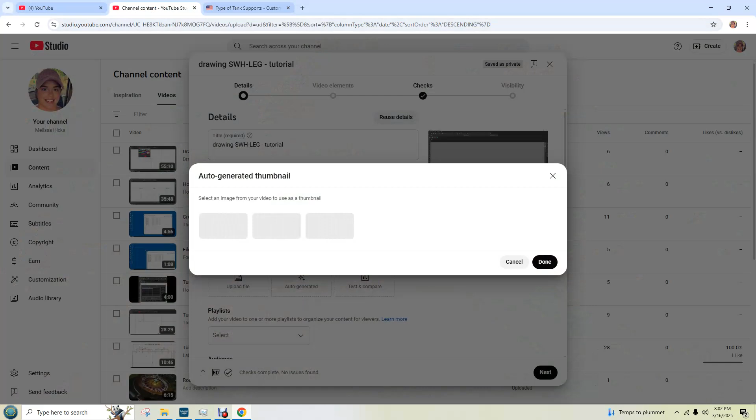For this video, I'm going to have you draw tanks on what we call box skids, B-O-X skids, but the formal name for them are tubular skids. These are probably the easiest ones to draw, and this is what they look like. It's just a flat piece of metal, bent the same way a leg tank is bent. It's real similar, the dimensions are just a little bit different.

So I'm going to show you how to take your existing leg tank drawings and make tubular skids. You go to your double wall horizontal folder and go copy. Of course, I'm working on my home PC, I don't have the same thing that you have, this ain't been updated in a while. But you're going to copy the entire contents of that folder.

You're going to paste them into here, and you're going to change for each one, LEG to BXSKID. So you're going to change every one of them to that.

Now just do a Control-C, Control-V. There's some batch renaming applications. I used to have one of those and I don't have it anymore. I don't work on a PC much anymore.

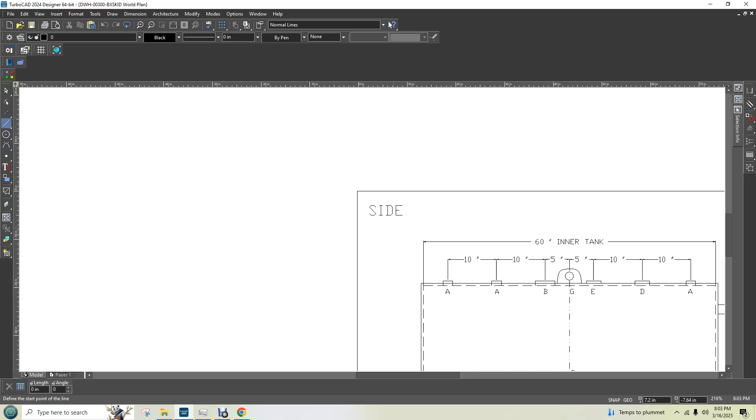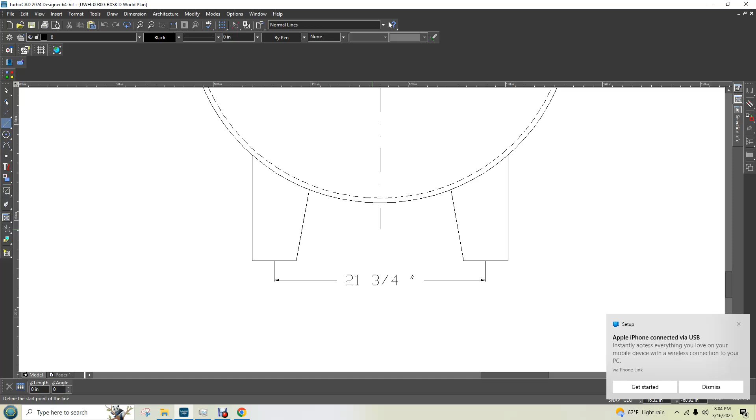We've got to do a little work to these because this dimension down here, I've actually got to get you to redraw these. That dimension is going to have to be different because we do these in a manner on which they can be mounted to a truck frame. So I'm going to check and see what we've got here, because I know we've got to be 34 inches end to end, and here we're not, we're 26.

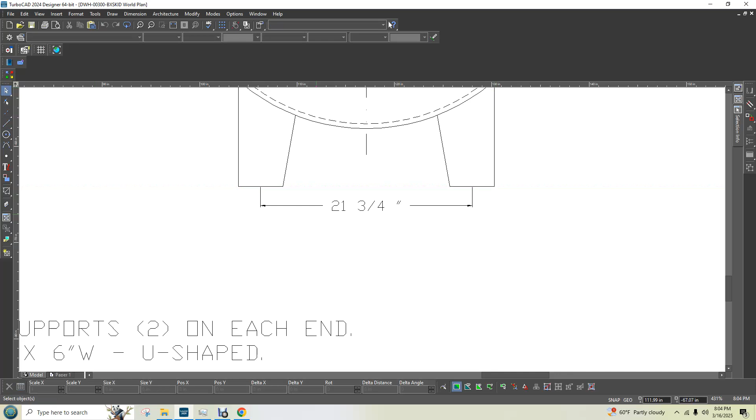Now, for every one of these that you draw, you're going to need to be 34 inches end to end. That's our given information. So you're going to have to redraw these, and I'm going to show you how to do that. I'm going to make a note about that angle right there, that was like an 80-degree angle. I gotta write that down, 80-degree angle.

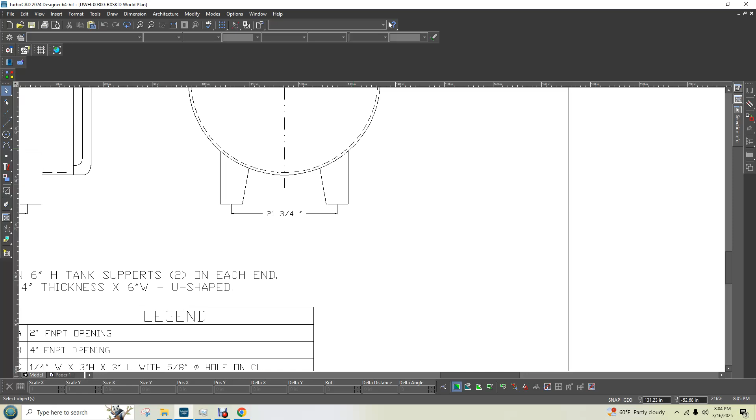So really, our other given information here is we are 6 inches from the bottom of the tank down to the ground. That is every support that we have, for 6 inches.

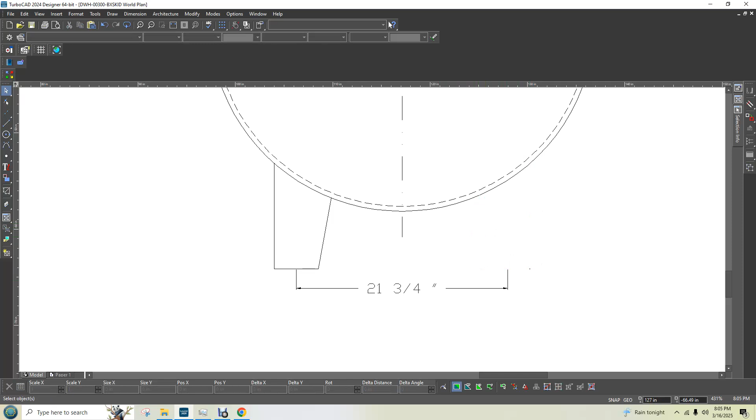So we're going to take all these pieces and delete them, take everything here and delete it. This is going to be the same procedure for every one of these that you draw. Our given information is we are 6 inches from the tank to the ground.

So I'm going to do a temporary line that is 6 inches at 270 degrees, and that's going to get our height to the ground. We are 34 inches end to end, so half of 34 is 17. So we're going to go 17 inches to the right at 0 degrees, and 17 inches at 180 degrees to the left.

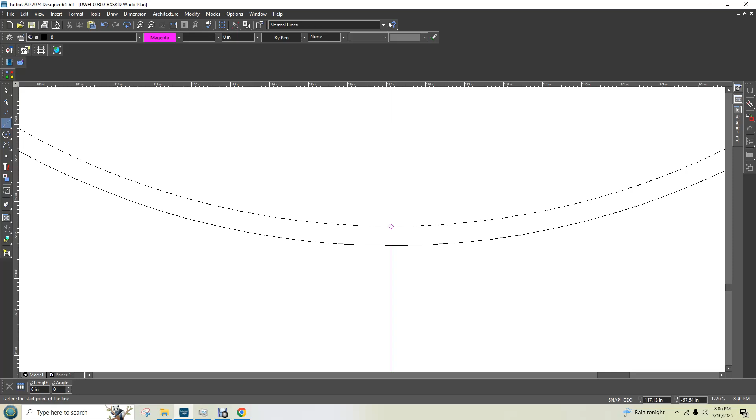Now we're going to do a permanent line. This is going to be a little bit tricky. We want this to be at a 90-degree angle, and we want to touch that circle, so it's going to take some zooming in. See how I went to local snap, right click, local snap, I'm going to do nearest on graphic. That makes the most sense to do here.

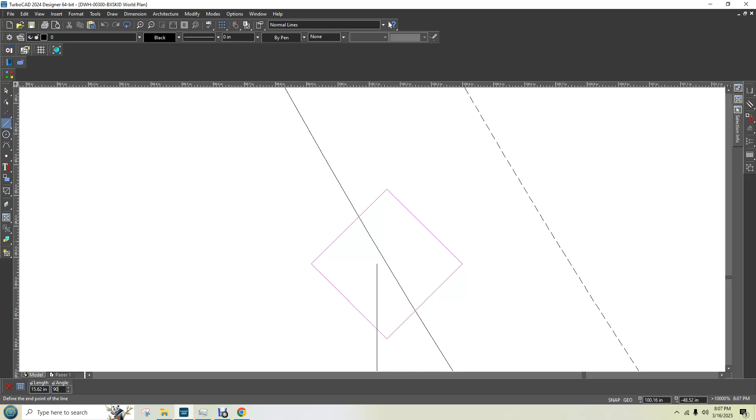See that pink diamond back behind my little plus symbol, how it just runs along? I'm going to change to 90 degrees, and I hope that it just snaps right in. It didn't, but that's okay, let's just hit enter, we're going to make it snap in.

All you have to do is grab that and just pull it up, and just keep zooming in until you see it touch. All we can do is all we can do at this point. Now see, I finally got that little pink X there, it finally touched it.

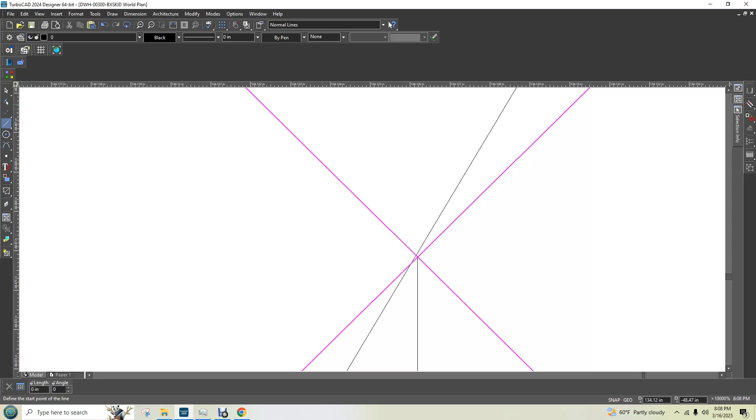Now over here it's going to be easy because we've got our size Y is 15.67. We should be able just to do a 15.67 line at 90 degrees and it should touch. Let's see if that doesn't touch it, and it sure did not. You're always going to be off a little bit, that's okay, we're going to zoom in as far as humanly possible.

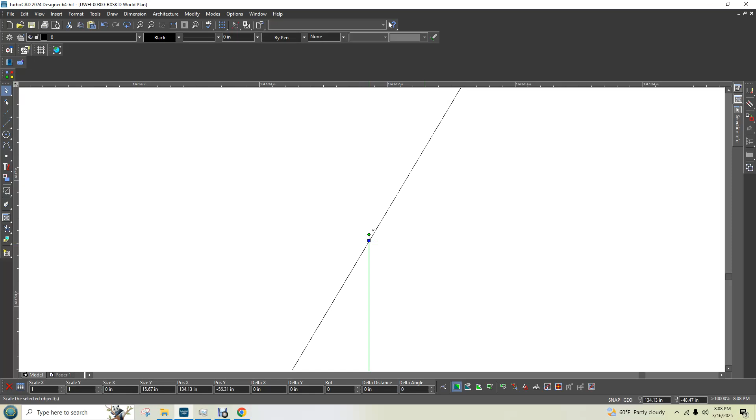Grab that and pull it up. It won't let us zoom in no more. See, we finally got that little pink diamond, I went down just a little bit, like I moved it up and down, and I finally got that little pink diamond. That's what you're looking for, is that little pink diamond. So over here, just go up beyond it and back down, you'll finally get that little pink diamond for the intersection.

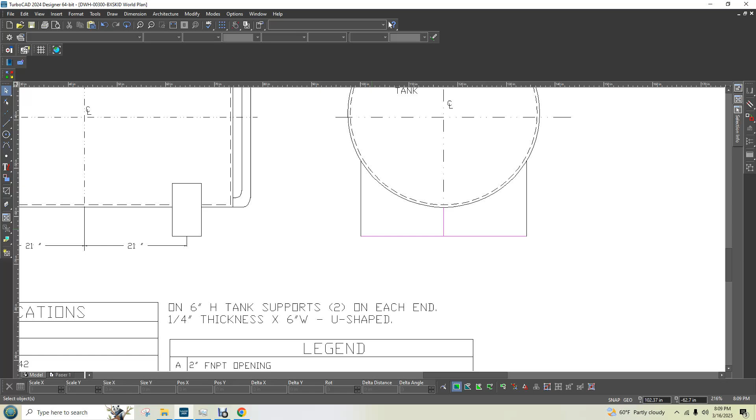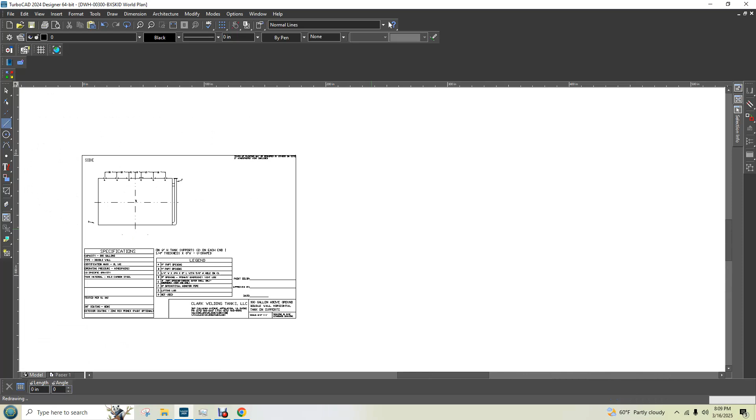The next thing you want to do is delete your temporary lines. The foreman said that the base on these is 3 inches, so we've got a 3-inch base. Okay, a 3-inch base.

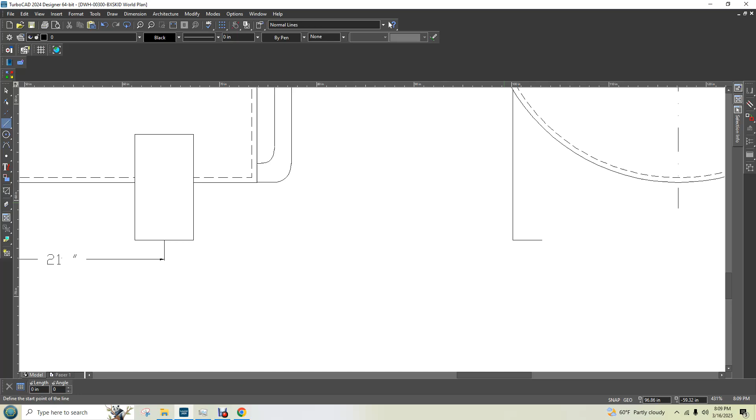And then now we've got to connect it. We're going to start a line here. You draw a single line or hit the little line icon over here, either way. And sorry about the wildness of this mouse, I hate working on this computer at home with a touch mouse. We're going to go local snap, nearest on graphic.

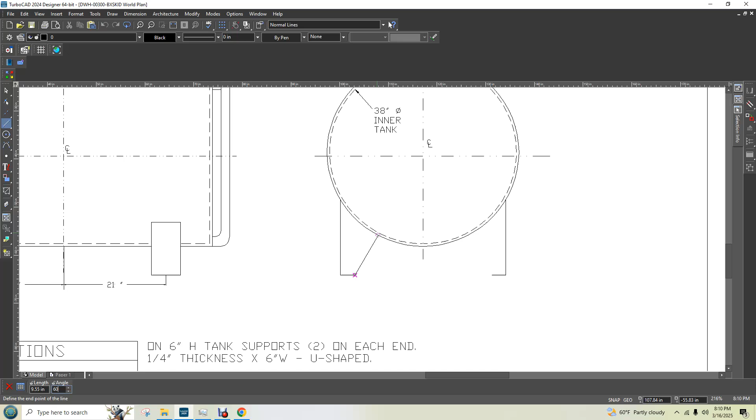We're going to do a 60-degree angle here. And it snapped, but it snapped on the inner tank, and that's not what we want. I'm going to have to redo it and try a 60-degree angle again.

Right click, local snap. Let's try intersection and see if that does any better. I don't think it does though. It don't. I got all kinds of messed up now.

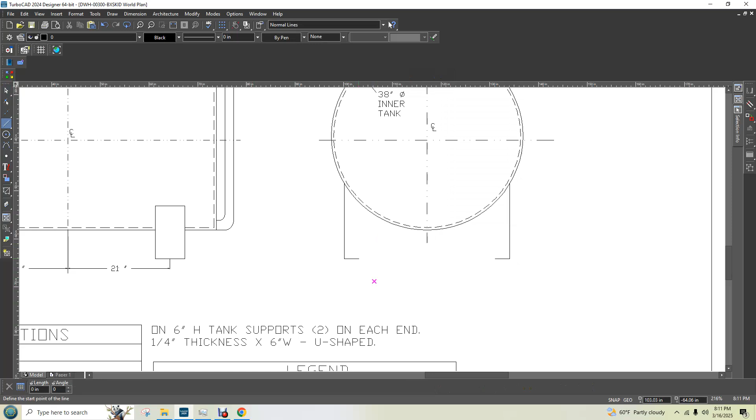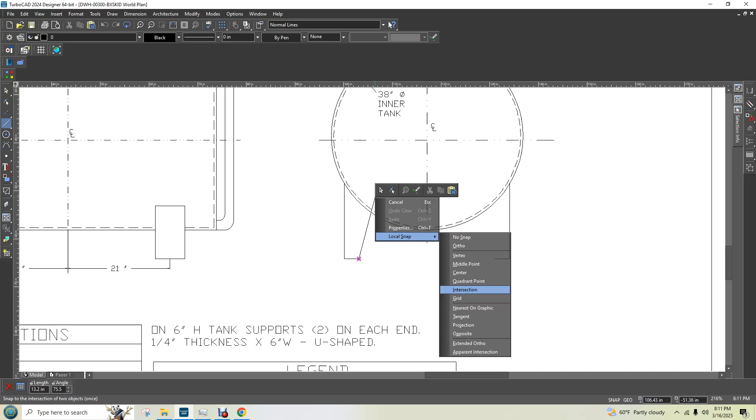So you're going to do it while your line's in your hand. Right click, local snap, intersection. I'm going to zoom way in, trying to get this thing. No, intersection doesn't do good. We gotta do nearest on the graphic.

Right click, local snap, nearest on the graphic, and you gotta make it do that while the line is in your hand. I'm looking for a 60-degree angle, trying to get that while I'm moving left to right here on this line. That's really the easiest way to do it, but if we can't... I got 59.99.

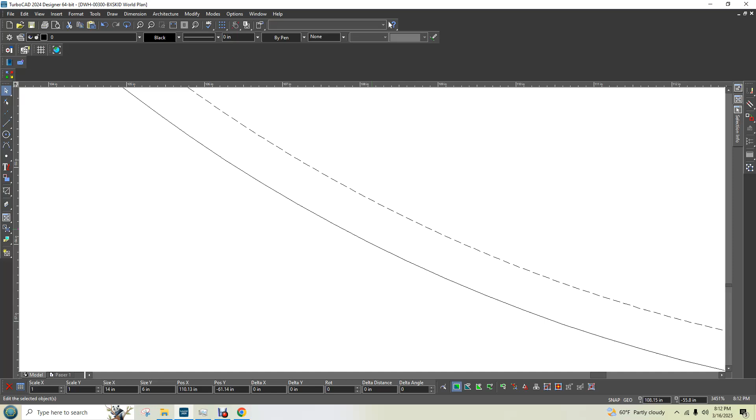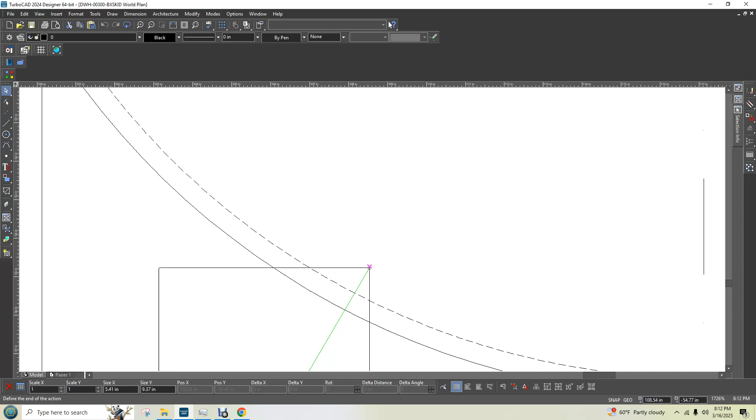Be better just to draw it longer and then snap it back. Now I'm struggling, and you're probably like, what is she doing? Alright, I'm just gonna draw it longer and snap it back. That don't work either. This is really hard to do.

Okay. I wish I was getting paid by the hour to do this. And I'm not, I'm doing this for free, because I'm salary paid. Okay.

Nearest on graphic, zoom way in. We're looking for 60 degrees. This is so hard to do. This is why I did all the easy ones for you before, because I didn't want you to start out doing these. You'd be so intimidated. Now we're on 60.

I'm going to be so careful. I'm actually just going to let go of my mouse, and I clicked it. I let go of it and I clicked it. Okay, so this line, our size X is 4.78, size Y is 8.28. We're going to do 60 degrees.

Okay, let's try this. Local snap, nearest on the graphic. What was that, 8.28? 8.28 and 60 degrees, let's try this. Oh no, we can't do the 60 degrees because we're going the other way.

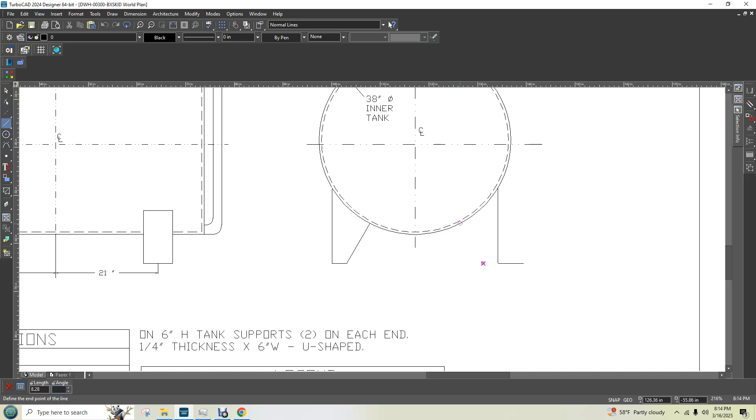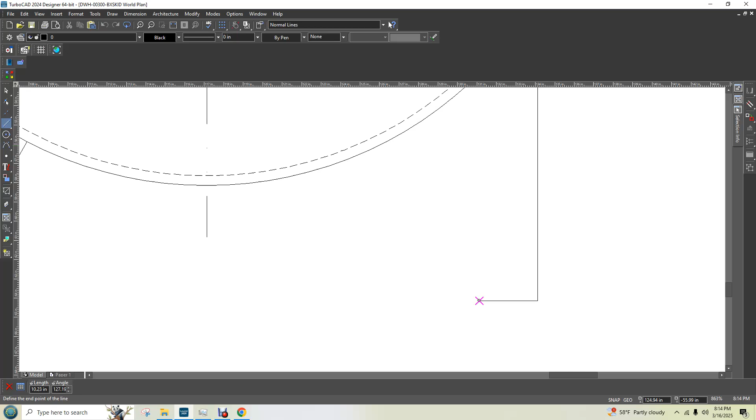Shoot, we're going the other direction. We can't do that. We gotta do 120 degrees. So let's try, because 90 minus 30, a 90-degree angle is straight up and down. So 90 minus 30 is 60. 90 plus 30 is 120. So that's why we're doing a 120-degree angle, because we're going the other direction.

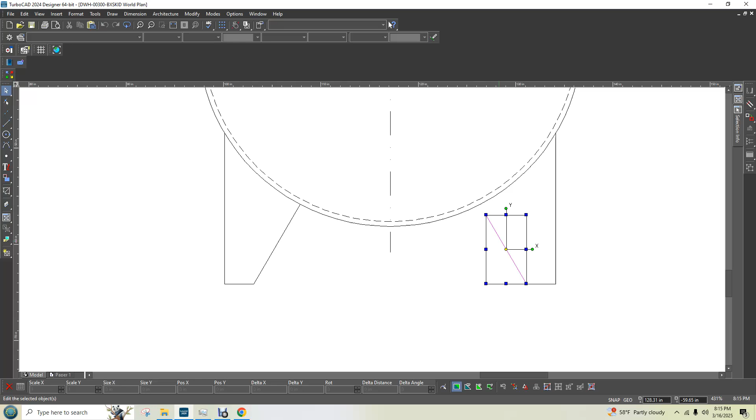So 8.28, 120-degree angle. Let's try that. That just ain't gonna do it.

Let's try something else here. Let's try another little easy way. Let's try to make this easy. Let's do an exact 360, or a 0-degree line, right there that touches that wall. And let's connect to that and go down here and connect to this.

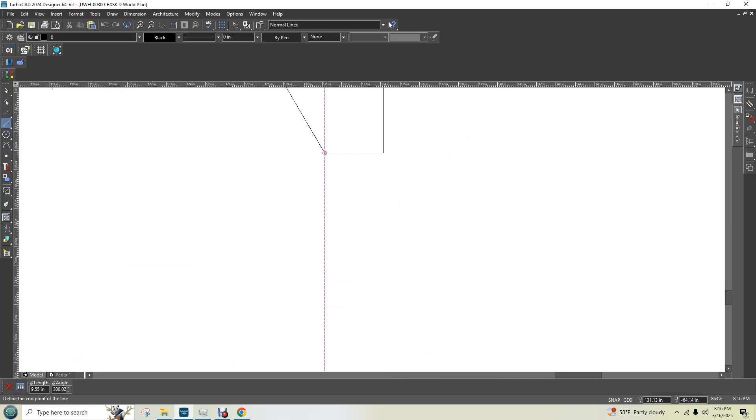Oh my gosh, I got all kinds of mess here. My computer's froze again. As soon as I can pause this video, I will. I mean, this is confusing enough, and the video is just... I'm gonna close some stuff out here. Okay, this is confusing enough and the video just froze up, so that did not help.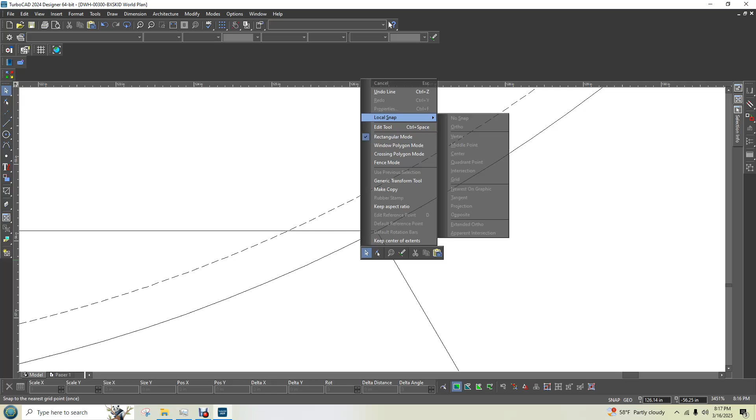Alright, so you see how I drew that line over there and made it touch using local snap and nearest on graphic? I drew just a straight line over there and made it touch, and I come off that straight line down because it's so hard to attach things to circles.

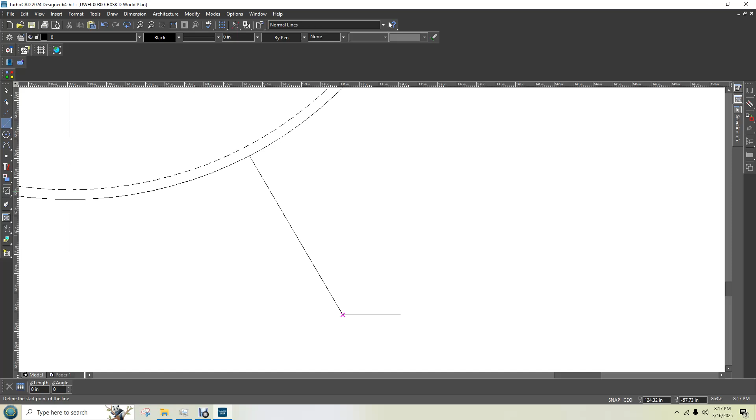Now, I was close about it being a 120-degree angle to make it touch that circle, but as you can see, it's actually 120.02, and we ended up being 9.55. Yeah, the length of that was 9.56. Okay, so if you would have done a 9.56 at 120 degrees, it would have worked.

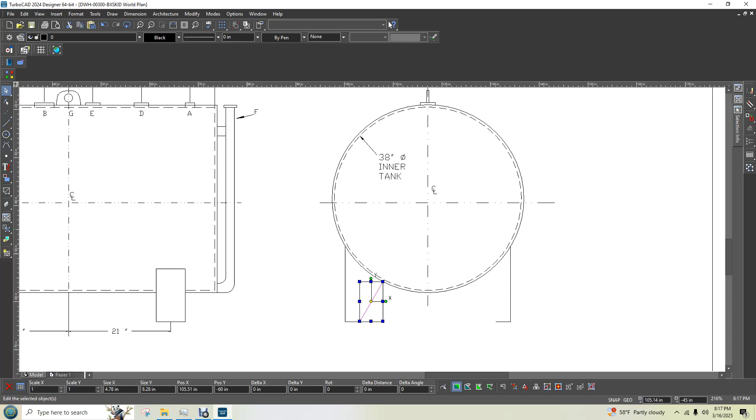I don't know how I got 8.28, but what I should have done, I'm sorry I'm making you dizzy, instead of looking down here at the size Y, I should have took a line and actually measured it. See how I got 9.56 at 60 degrees?

So see, I could go, instead of 60, now we got to go the opposite of a 90-degree angle. 90 minus 60 is 30. 90 plus 30 is 120. So go 9.56 at 120 degrees. 9.56, 120 degrees, and that should touch it.

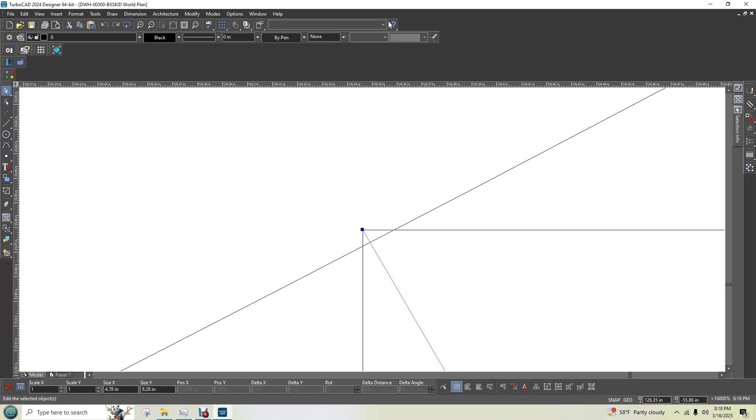And it did, look. Not quite. Not quite. What if we did 9.55 at 120 degrees? Would it touch it then? 9.555?

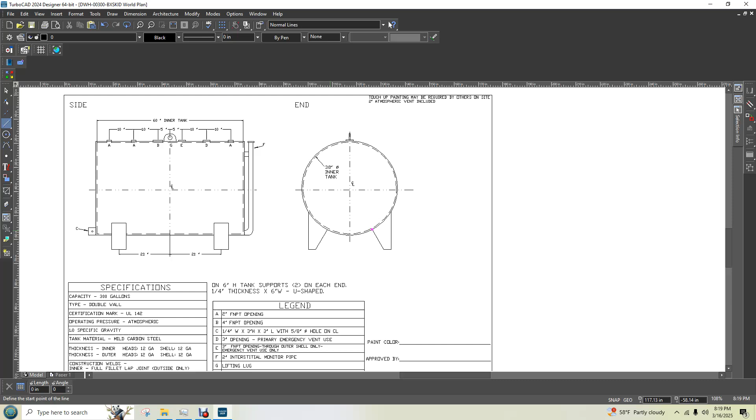Maybe let's just do it the way I originally showed you. Start right here, come out, local snap, nearest on the graphic. Now I'm not clicked anywhere, I'm just following along with this diamond. I'm getting to a 0-degree angle or a 360. Now look, it says down there 360.

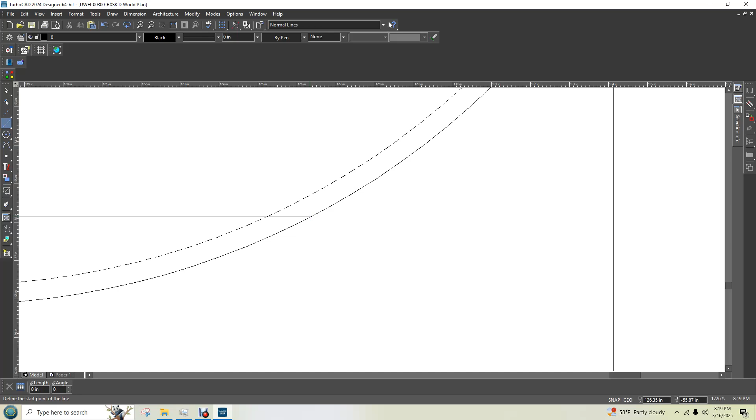I let totally go with my mouse. I'm not going to touch that mouse, my hand is off it. I'm going to tap that left mouse button. Now I'm going to come off of that line, and I'm going to come down to that line, and that connects it and makes it touch the circle.

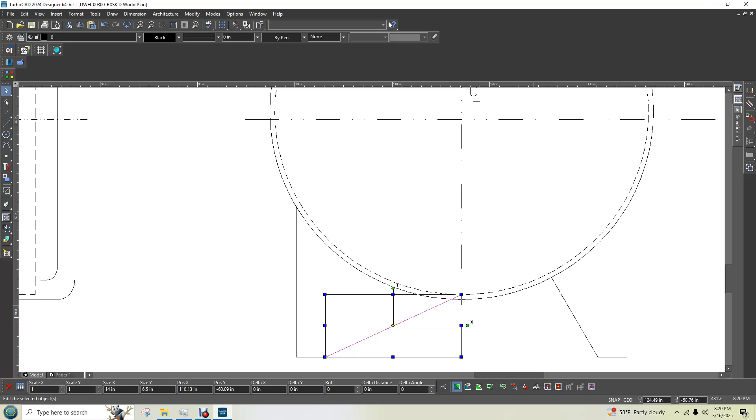Now I had people that draw for me in the past, and I get this kind of stuff. I get like... hang on, I'll show you. Anyways, I can undo this in a minute. I get this kind of stuff, and this is not what I want to see. I don't want to see this.

I'll show you in just a minute.

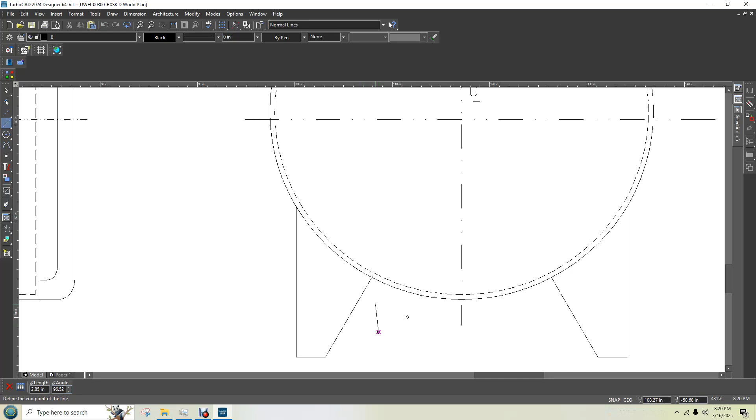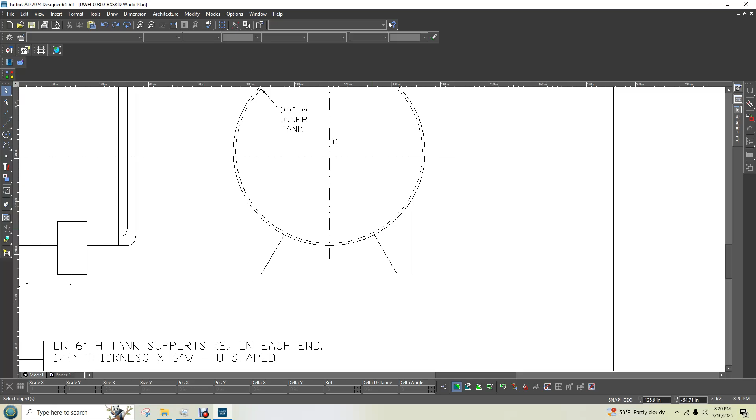I don't want to see that line crossing over like that, because if it takes you an hour to fix it, I'd rather it be right. And I also don't want to see this big wide gap right here. So if it takes an hour to fix it, really do your diligence and get those lines connected, because when people see these DWG files, they can zoom way in, and we don't want them to see a big mess.

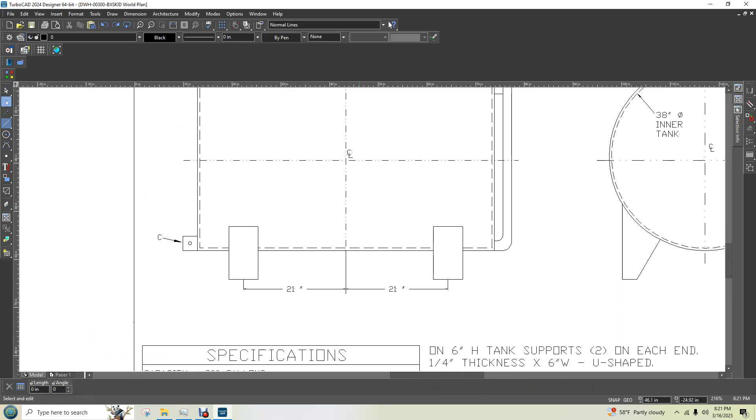Okay, so the next thing we want to do is a temporary rectangle off of these legs, because we know that these legs are 6 inches high from the ground.

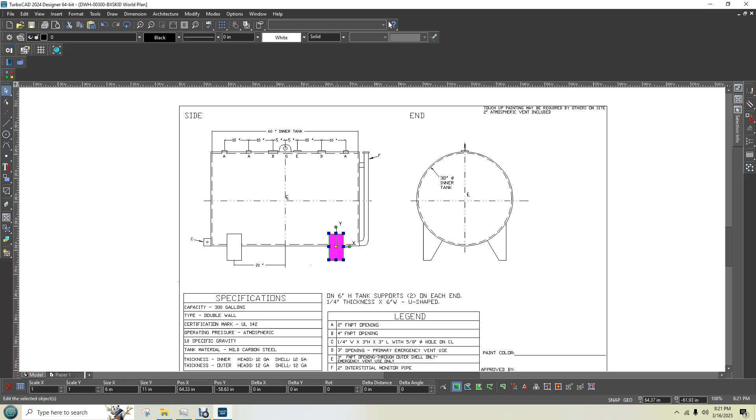Or we could just go ahead and delete these legs, because we're not going to need them anyways. We're not even going to need them. I want to see something before I delete this though. White, white, no. Okay, let's delete these legs. Not gonna need them anymore. We're done, okay.

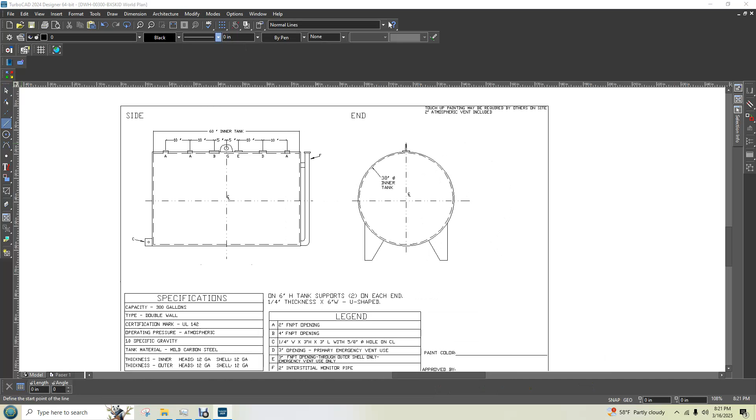Alright, let's do a temporary line. And we're gonna go 6 inches, 270 degrees. Okay, we need to see what this height is right here.

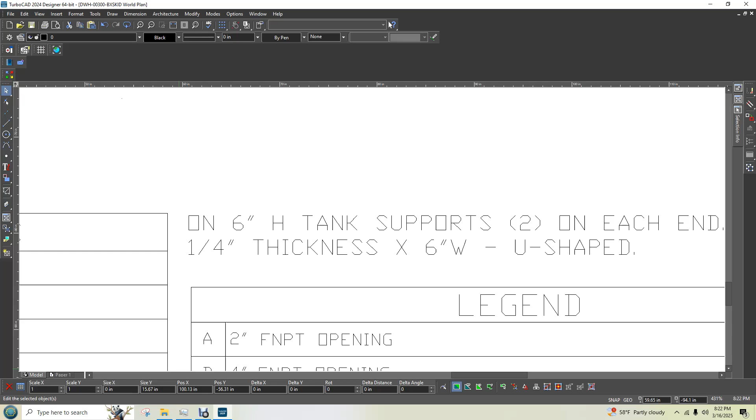This height, as you can see, size Y is 15.67. So we want to draw a rectangle, and we want to start at this temporary line right here. And we want to go 15.67 high, and it's going to be 61 inches, just like the tank.

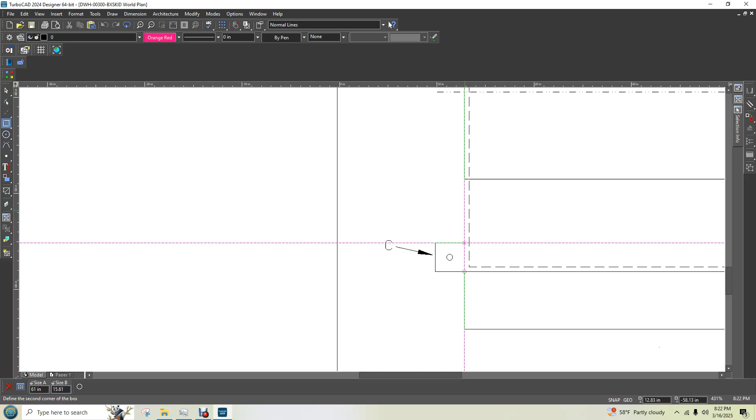15.67 high, I forget things as fast as I see them. 15.67, yes. And that should have been black, because that's the permanent line. Okay, black. We'll go down here and delete our temporary 6-inch line.

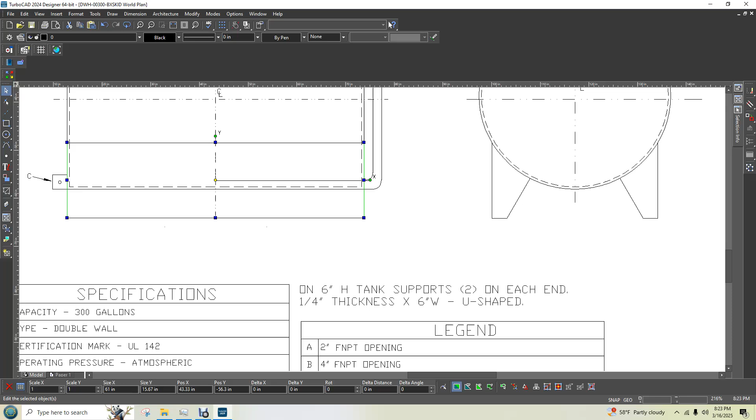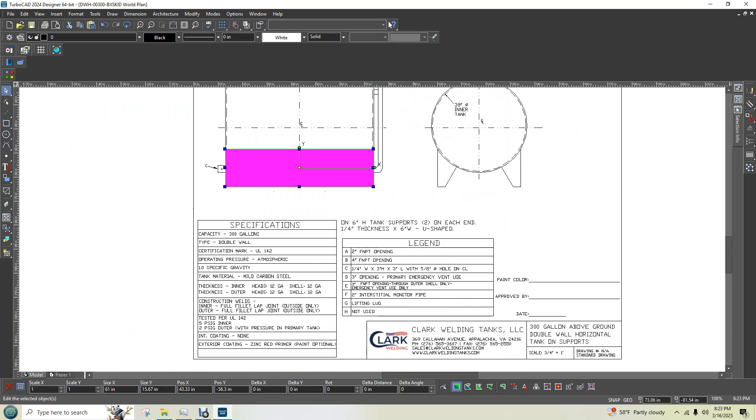And now we want to go to brush, white, no, why can't I change that? Oh, pattern, white. So we go pattern, white, white, no, and hit OK. We should get just a box. There we go.

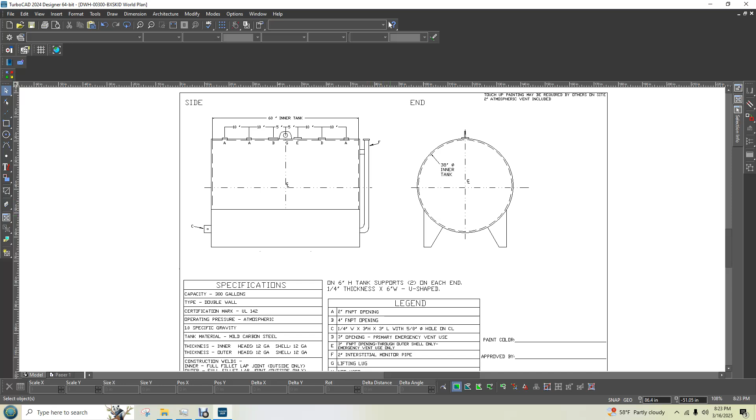Okay, and I want to see if there's anything I want to do there. I don't know how much I like that.

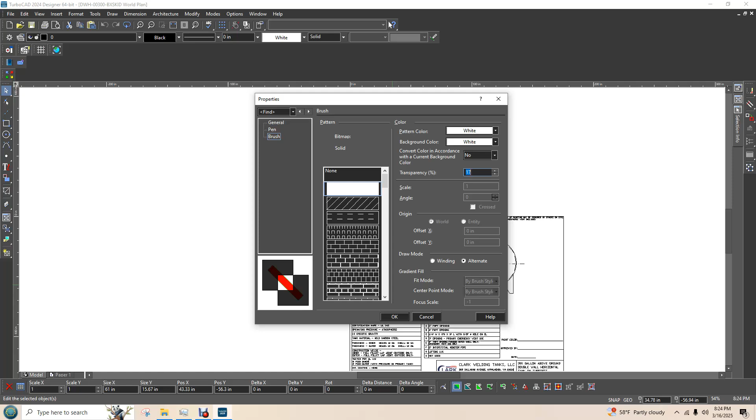Let's do a transparency, see what happens if we do a transparency, because I didn't much like how that looked a minute ago. I'm kind of learning as I go, I've never drawn this one before.

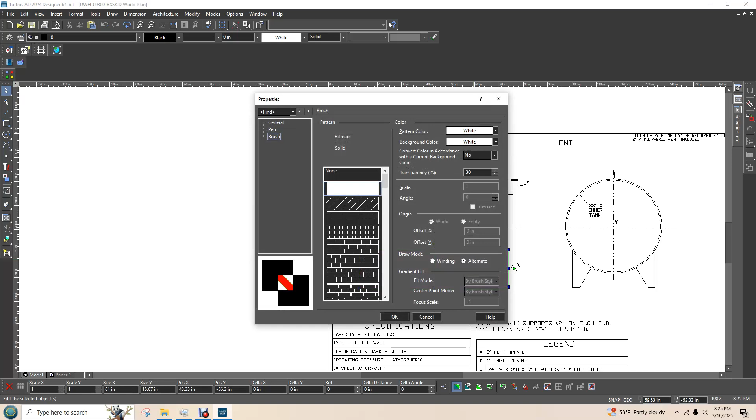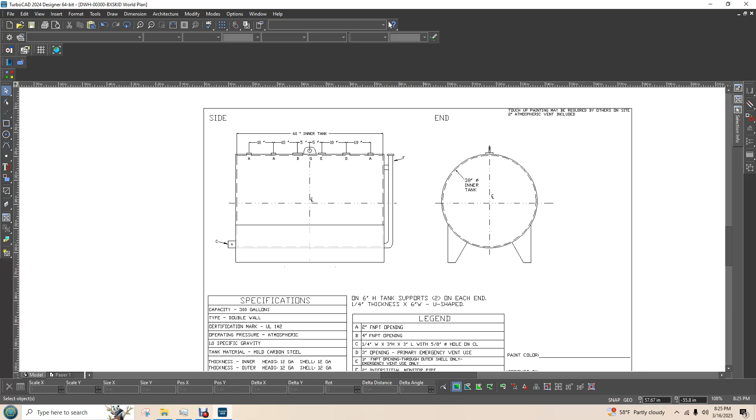Let's do a 30% transparency, and that way we see what's actually behind that. And I think that'll be good. So that's going to kind of give us a side view, and it's going to show the runner, but we're going to see a 30% transparency under it.

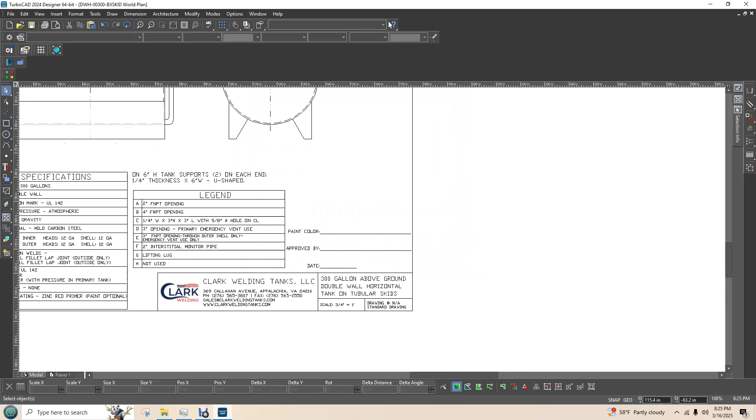Now, what we want to do here is mark this on tubular skids, and we want to show a dimension. I hope after I did all this work we're right. It's supposed to be 34 inches end to end, and we are.

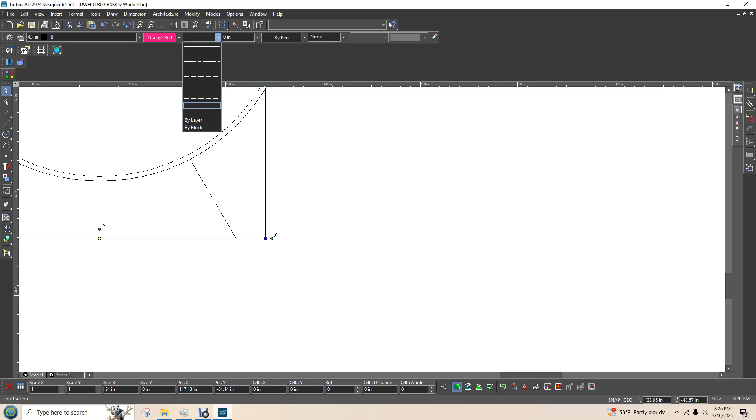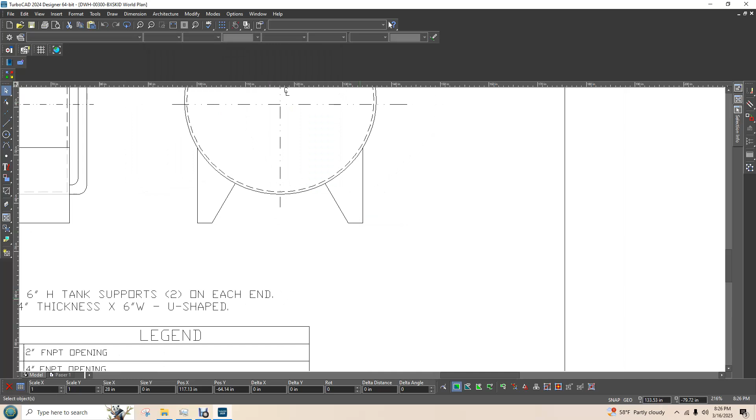I'm going to go ahead and make this an invisible line, because I want to show the inside and the outside dimension. The reason why is because some of our customers buy these and put them on like a truck frame and use them non-DOT, just to move stuff around on a job site.

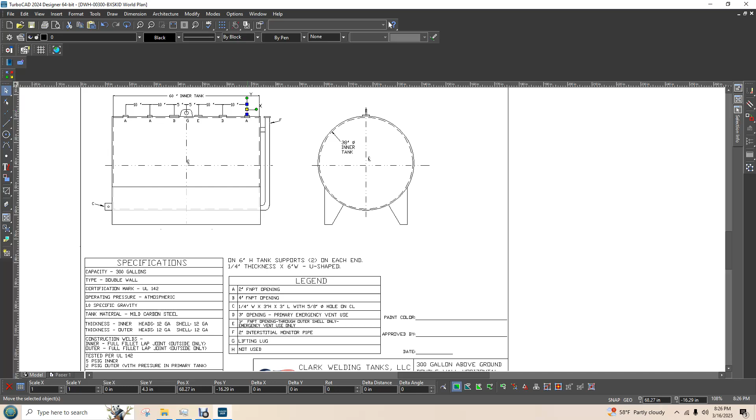I'm gonna do a dimension smart, and I want to be consistent with what's on the top. Our top one was 4.3 inches tall, so dimensions smart.

I want to go, and then here I want to get this long temporary line that we had, and where that was 4.3, let's try 8.6. There we go, that'll look good.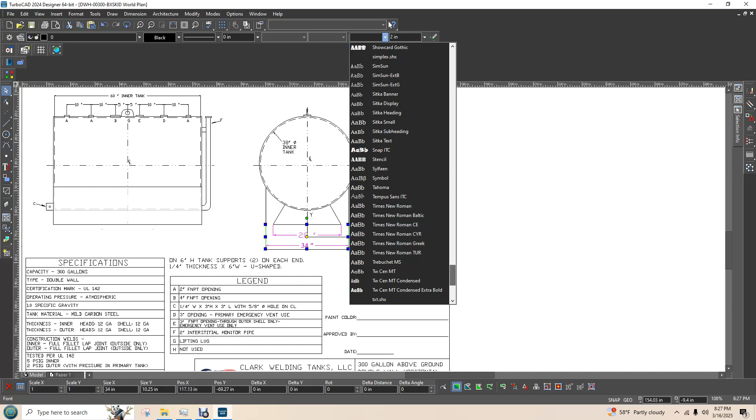And we're going to change the font. Sorry that I jump back and forth in these videos sometimes, but some of this stuff I've never drawn before. I have to kind of learn it myself at the same time as you're learning. So it's almost like we're in a class together, both of us learning.

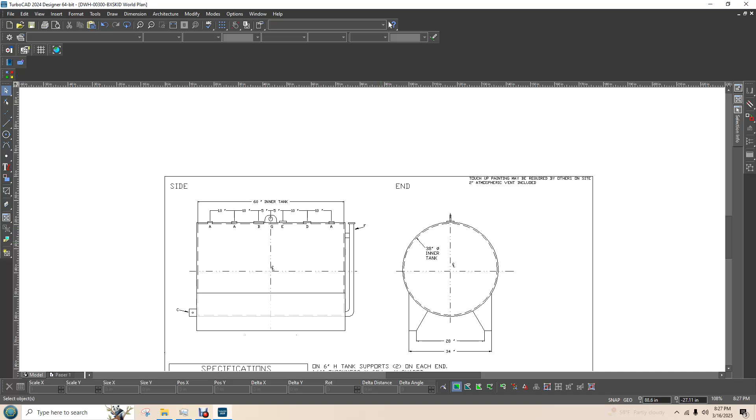And we want to make that font consistent. I think that was the 1-inch font up there. We want to make that consistent, and this is how we do it. I think that's good enough. So that's, oh, okay.

Right here we gotta change this. We're gonna change this right here.

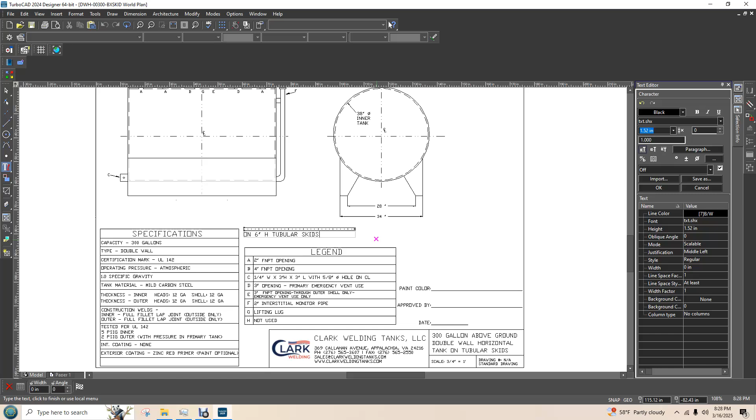I can't remember the thickness of those, so we're just going to call it a 6-inch high tubular skid. If I find out the thickness in the next couple of days, I'll get you to go in and make a note. I want to say they're 1/8 inch, but some sizes may be 1/4 inch, so I don't want to notate that right now.

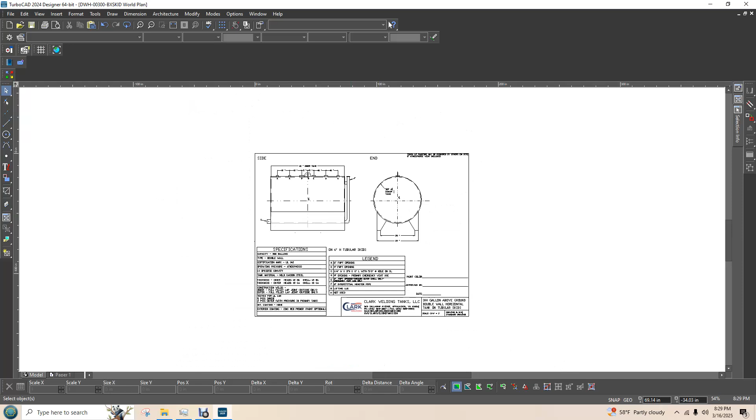All right, so there's how we're going to label that, and that's how we do it. If you have any trouble with this, ask me, but take all the time you need, even if it takes an hour per line, because that's good learning. Let me know if you need any help.